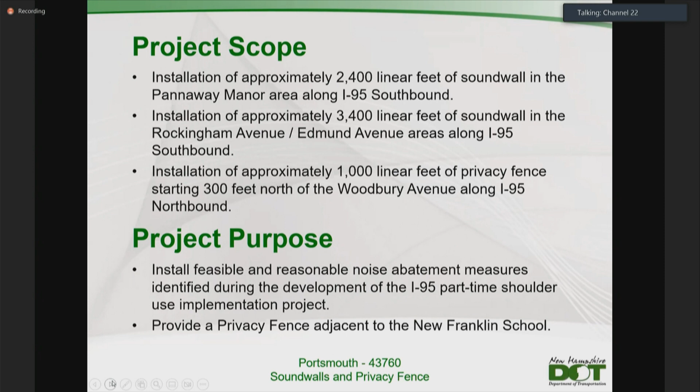Well, good evening everybody, thank you for coming out tonight. As Sam mentioned, my name is Phil Kendall, and I work with HNTB Corporation. We're the consultant firm helping New Hampshire DOT design the sound wall and privacy fence in Portsmouth. Here with me today is Dylan Gobey, who's going to be running the computer and the projection screens up here.

Before I get into the project overview, I'd like to go over the graphics on the walls that most of you were looking at before the meeting tonight. What's being displayed there is our proposed design, with aerial imagery underneath. Please note the aerial imagery closely matches the ground survey, but there are some slight differences. We also have some displays in the hallway out there.

There were also some profiles below those plan views, which I'll get into more detail on when I get into the presentation. There just wasn't enough room to hang up the profiles in this room. As I go through the project overview, Dylan's going to zoom into the plans so you can see them better from your seats. I know the plans are small in the distance, and even on the screen across the room it can be hard to see, so don't worry, Dylan's going to zoom in and you'll be able to see things in a lot better detail.

The sound walls for this project are broken up into two areas, as Sam mentioned. There's the southern area down by Sherburne Road, and then there's the northern area up by Woodbury Ave. I'm going to start with the overview in the southern section, and this plan shown on the screen is the same as the plans on the wall. It's just a little bit brighter up here, and Dylan's going to zoom in for us.

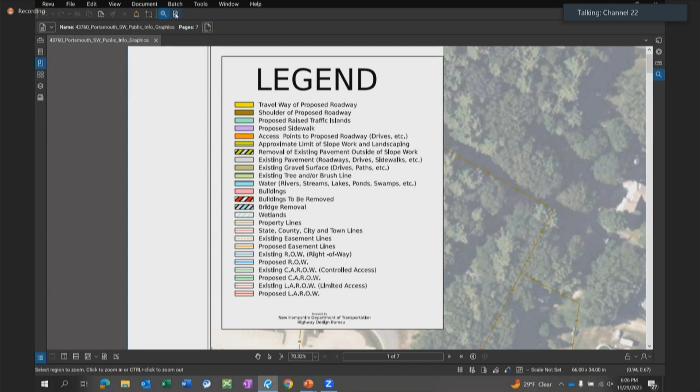Now, the southern segment of the sound wall starts just north of the right-of-way line near the bus terminal station and extends 400 feet north up to Sherburne Road. In this plan, you'll see the two colors I just mentioned, the light green, which is the existing tree line that's going to stay post-construction, and the lime green, which is the area disturbance, all within the state's right-of-way.

That area disturbance will be used by the contractor to access the construction site and to construct the sound walls. In the middle of this portion near Sherburne Road, you'll see a little bit darker image. That's representing a stone slope stabilization, used to stabilize the slope because it's a little bit steeper than a standard 4-to-1 slope. That's not typical for the project, but in some locations we had to utilize slope stabilization.

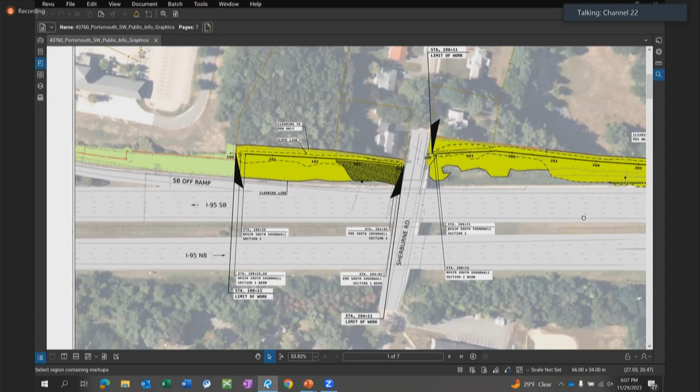In this area, the sound wall is approximately 60 to 65 feet off of the edge of pavement up on top of the hill. The second segment starts on the north side of Sherburne Road and extends approximately 2,000 feet to the north, running behind Pannaway Manor.

In this area, the sound wall offset from the highway edge of pavement varies between 80 and 25 feet as we go along. Again, you'll see the lime green color on the screen. That's the area disturbance that the contractor will use to access the site to construct the sound wall, but all within the state's right-of-way.

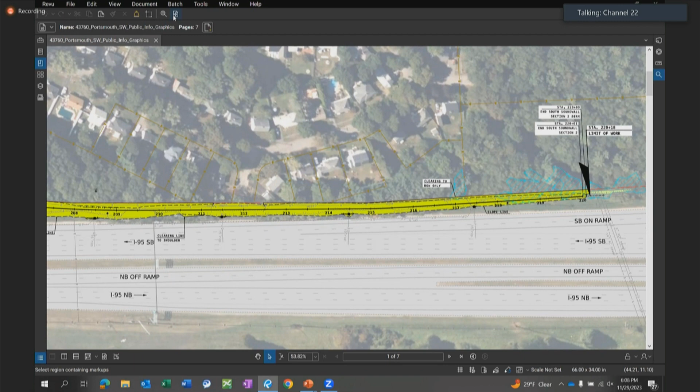At this point, we'll take a look at the two profiles for these two sound walls I just mentioned. In the upper left-hand corner is another legend. This legend has 5 colors in it, very similar to the previous slide.

The light green is the proposed slope work. The light brown is the existing ground. The dark gray is the proposed sound walls. The light red, or pink, is existing buildings, and the light gray is existing pavement.

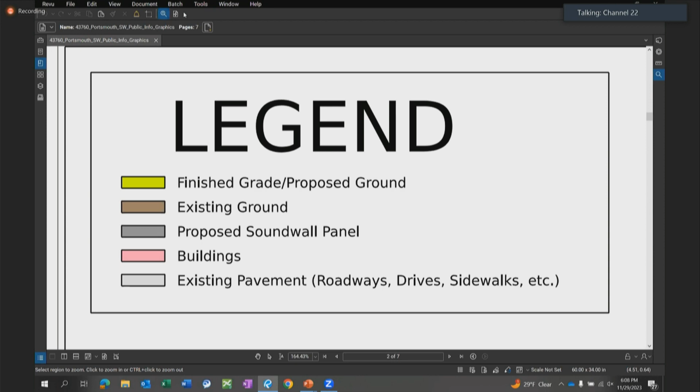The two profiles shown here represent the sound walls in the southern area, the ones I just talked about, spanning either side of Sherburne Road. The profile heights being presented here are based off of the noise study, and the heights provide the necessary noise reduction based on that noise modeling study. There are also gradual steps in the sound panels, which adjust the heights of the wall based on the needs developed by that noise model.

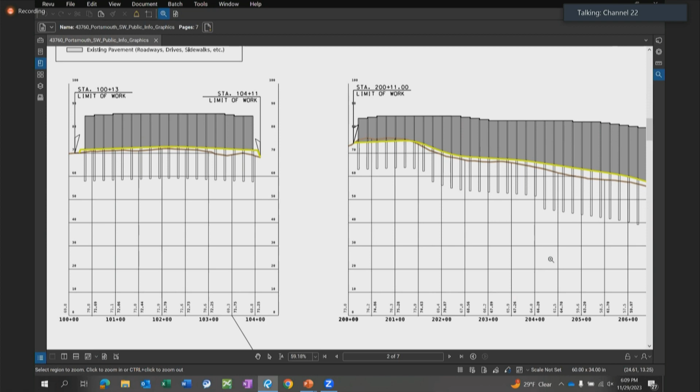What I neglected to say earlier, since I slowed down and Dylan jumped ahead of me, the sound wall height south of Sherburne Road averages about 15 feet. In the area north of Sherburne Road, extending 2,000 feet to the north, the height varies from 10 feet up to 25 feet, depending on where it sits on that berm, and comes down adjacent to I-95 southbound.

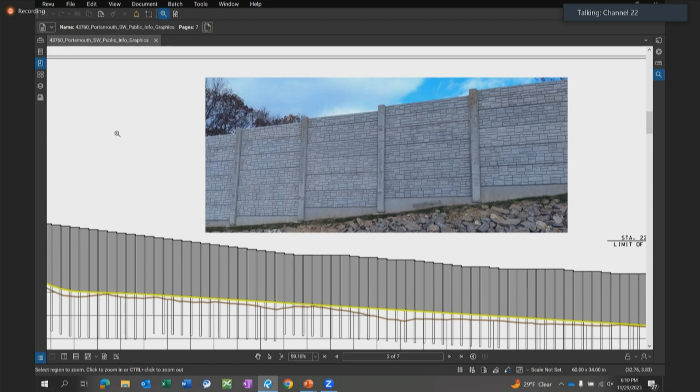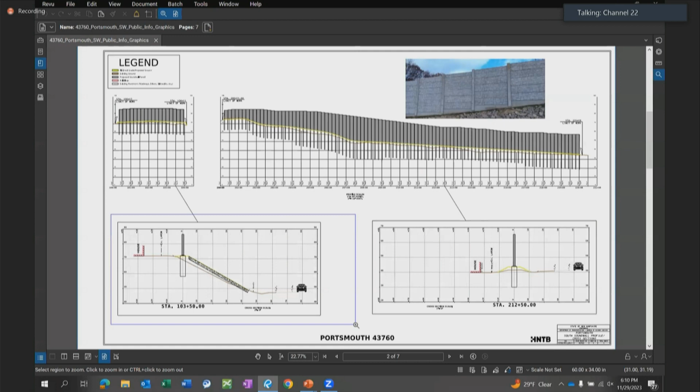They're intended to show the reference compared to southbound I-95 southbound, the sound wall, and any adjacent buildings. The first representative section is along the southern sound wall, and in this image you'll see I-95 southbound represented by the image of the car on the far right-hand side, and the proposed ground in front of and behind the sound wall is shown in the lime green, and then behind the sound wall is the light red showing an existing building.

Also in this image, you'll see that showing the stone slope protection I mentioned earlier. Again, that's not typical for all the sections throughout the corridor, but only in areas where we had to steepen up the slope.

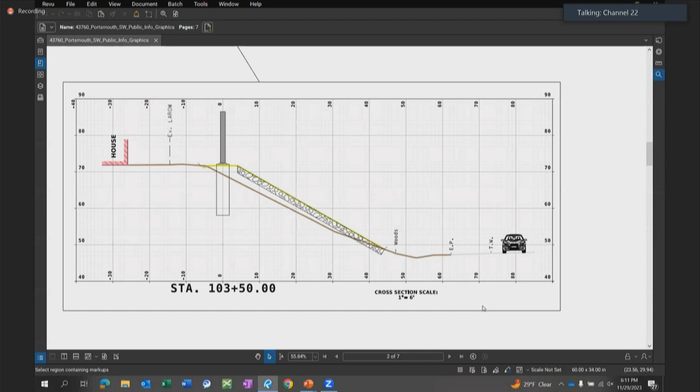The second representative section is along the northern sound wall, showing where I-95 southbound is on the far right-hand side, again by the image of the car, and then the light lime green showing the proposed slope and berm in front of and behind the sound wall, and then a house in the light pink shown behind that sound wall.

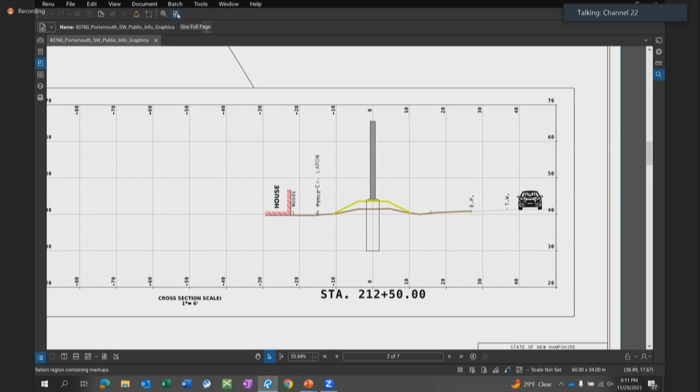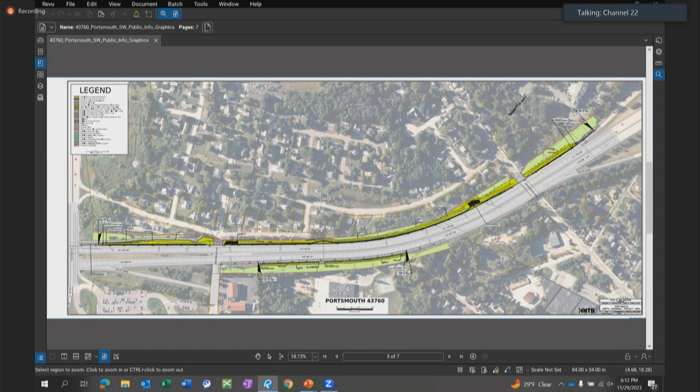At this time, I'm going to continue with the northern sound wall. This image, again, is very similar to the southern sound wall area, has the proposed layout and aerial imagery in the background, same as the graphic hanging on the wall. The difference between the northern sound wall and the southern sound wall is the northern sound wall is broken up into 3 segments. The first segment starts...

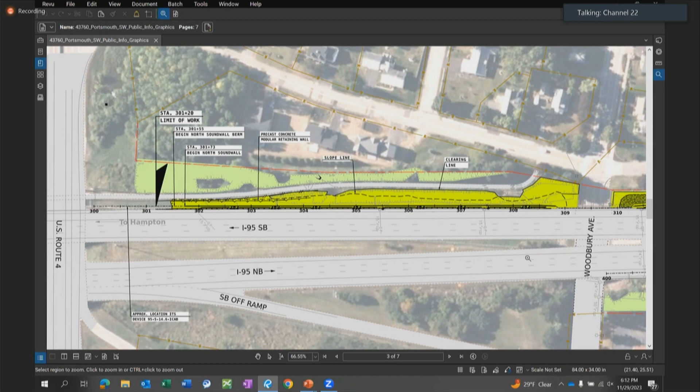Just north of Route 4 and extends for 700 feet up to Woodbury Avenue. What you'll also notice is this is the area where the multi-use path comes from Woodbury Avenue and up and over.

It should be noted that the intent is for this multi-use path to stay open during construction. However, there may be some short-time closures to allow the contractor to get their equipment in there or to do some small setup of equipment, but the intention is for the multi-use path to stay open during construction.

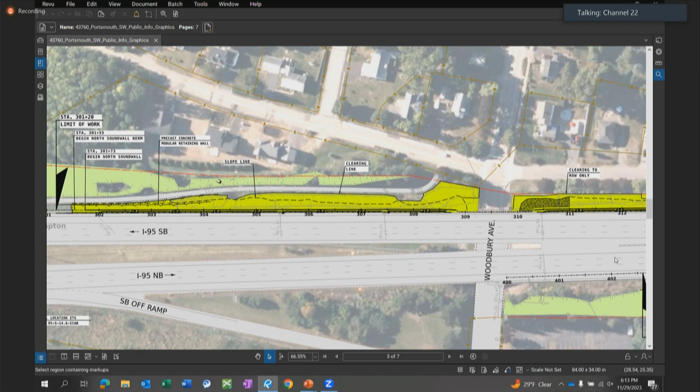As we're panning to the north, the second segment is approximately 2,000 feet, and it runs between Woodbury Avenue and Maplewood Avenue.

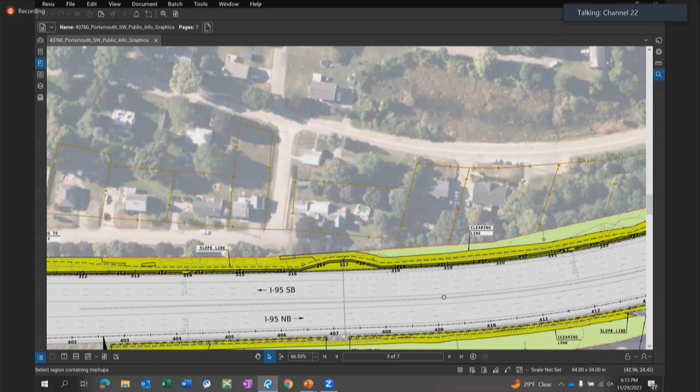This segment has 2 bump outs in it that are needed to get around the existing overhead sign structure foundation and the new part-time shoulder use sign foundation. In all other locations, this sound wall is approximately 5 feet off of the edge of pavement.

As I noted previously, in the same section you'll see the 2 different colors: the light green representing trees that will stay in place post-construction, and the lime green is the area of disturbance that the contractor will need to access and construct the new proposed sound walls.

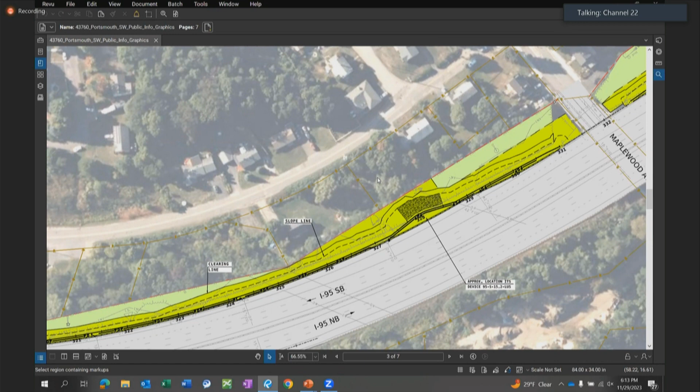The final segment, the third segment of this section, is about 340 feet long, and it runs from Maplewood Avenue and extends up to the Market Street on-ramp, which is the northern limits of the sound wall, and that's where the project will end.

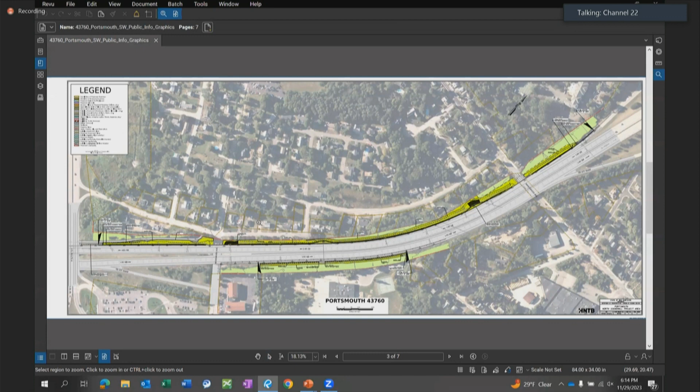Again, that section is also approximately 5 feet off the face of the sound wall, off the edge of pavement.

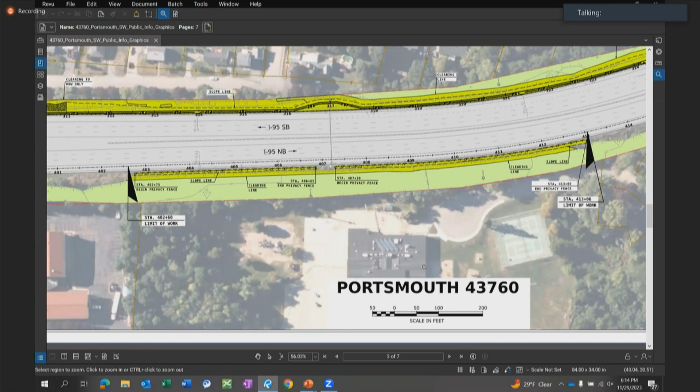Also included as part of this project is a privacy fence. The privacy fence, as Sam noted earlier, starts about 300 feet north of Woodbury Avenue and extends for 1,000 feet to the north. You'll notice there is a small 50-foot gap in that privacy fence, and that is to account for the existing overhead sign structure foundation.

We did evaluate whether or not we could do a bump out similar to the sound walls shown just previously. We looked at it, however, the impacts associated with installing the bump out to get around that foundation required all the trees to be removed on that slope right down to the school. So it was felt that it was better to leave the trees and put a gap in the privacy fence.

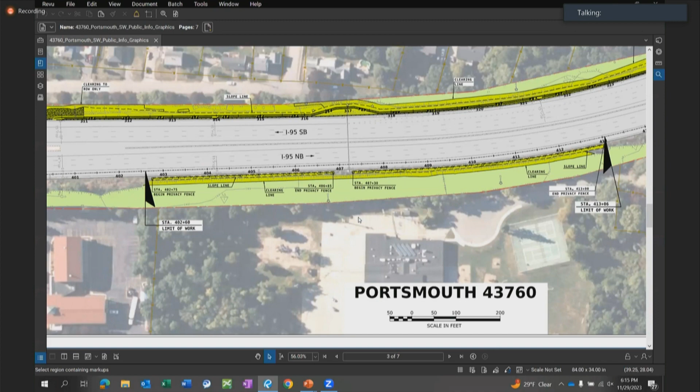Okay, the profiles. Similar to the southern sound wall area, the northern sound wall area has some profiles up here. There are 3 different profiles, or 1 continuous profile, but 3 sections of profile for the 3 segments of the sound walls. The heights of that sound wall vary between 17 and 21 feet from the southern end by Route 4 up to the Market Street on-ramp.

So you'll see the profiles on here, the same colors, that same image that I showed you about the sound wall that was just constructed in Londonderry. Nice architectural finish on those concrete panels, which will have the same finish here in Portsmouth.

Below the profiles are 3 representative sections. The first one is along that southern segment by the multi-use path. The second representative section is actually around the privacy fence. And the third representative section is in that middle section of sound wall.

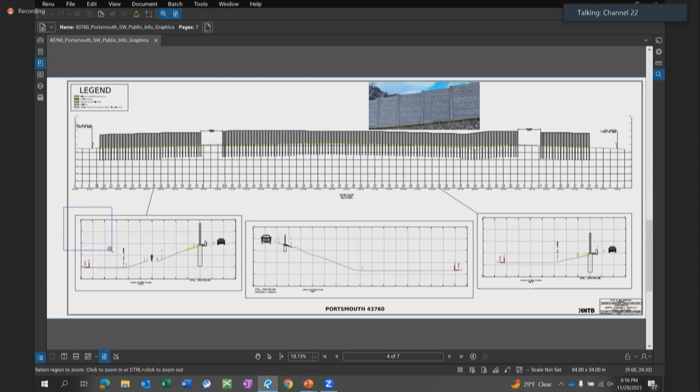So looking at that first representative section, similar to before, southbound I-95 is on the right-hand side, shown by the picture of a car. The proposed slope in front of and behind the sound wall is shown in that lime green, and you'll see the multi-use trail there behind the sound wall, and then behind that, in that light red, is an existing building.

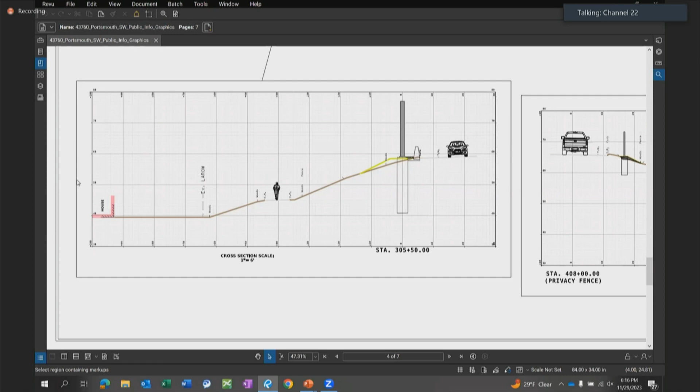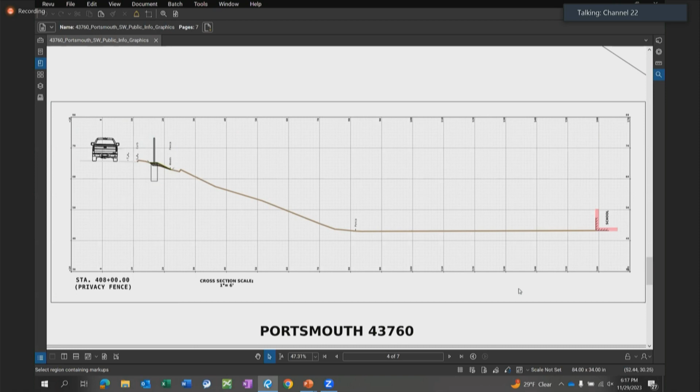As we pan over to the next one, the next representative section is again by the privacy fence. We showed a vehicle on I-95 northbound, a picture of a pickup truck on the left-hand side. Then again with the lime green showing the proposed slope in front of and behind the privacy fence, and the school in light red in the far right-hand corner.

The next representative section is that middle portion of sound wall. I-95 southbound is shown on the right-hand side in a picture of a car. We have the lime green showing the proposed slope in front of and behind the sound walls, and in the far left-hand side, in light red, is an existing building.

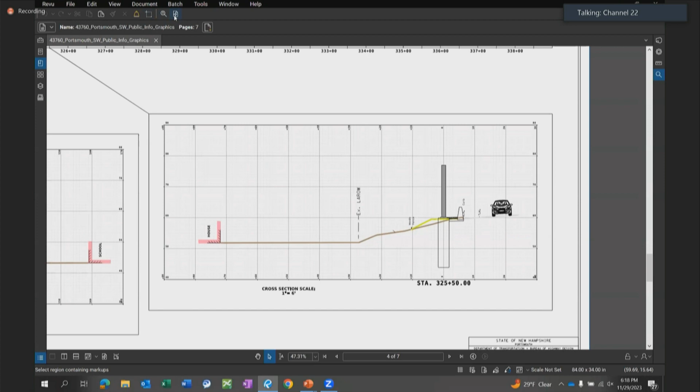So with that, I'm going to hand it off to John to talk about the noise modeling.

Thank you, Phil. Again, my name is John Evans. I'm the Air and Noise Program Manager for the Department of Transportation. I am also the Project Management Section Chief for the Environmental Section of the Department. Right before I get into the aspects of the noise investigation, I do want to mention a couple other things related to just general environmental review.

This project is, as with any New Hampshire DOT project, undergoing an environmental review as part of what we call the NEPA process under the National Environmental Policy Act. That requires us to evaluate all potential environmental impacts associated with any project, including this one. So we are evaluating endangered species and wetland impacts and all of those kinds of things as part of this environmental review.

One of those pieces of that environmental review is Section 106 of the National Historic Preservation Act, which is essentially a law that requires evaluations of potential historic and cultural impacts related to construction projects such as this.

Section 106 of the National Historic Preservation Act allows people to become what are known as consulting parties to that historic analysis process. If there are any individuals who do wish to become part of that 106 process as a consulting party, please get in contact with me via email, as well as Sam Newsom, via email or call us, or whatever—at the end of the presentation our contact information will be up on the screen, if you feel that may be something of interest to you. Again, that's kind of an advisory role to the historic review process. It's not necessarily related to, say, concerns related to noise specifically, it's more related to historic cultural resources.

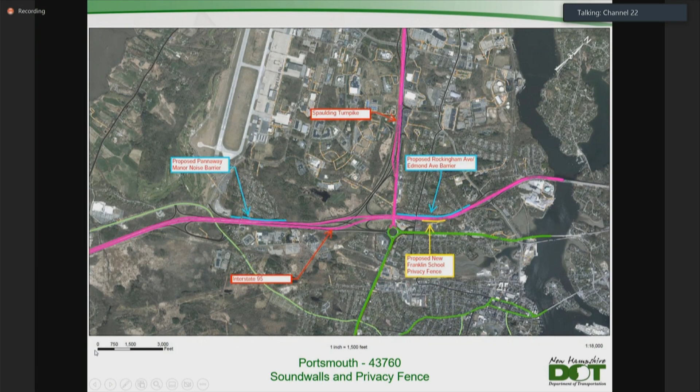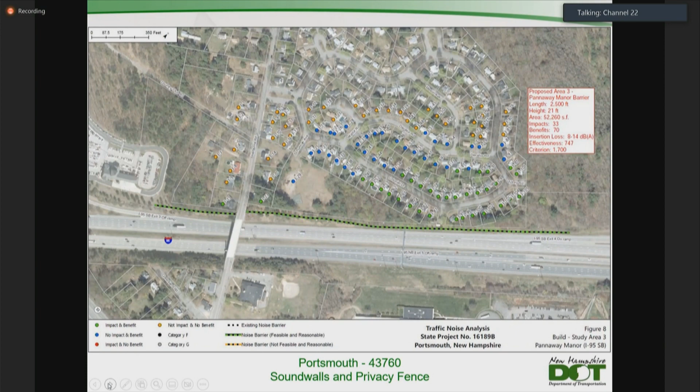So moving on to the next barrier, this barrier will provide... let me flip to this because I can read it better.

There were 34 noise impacts identified within the Rockingham Ave, Edmond Ave neighborhood. And this barrier would provide 49 benefits, meaning 49 homes would receive at least a 5 decibel reduction or more.

This barrier itself will require 72,180 square feet of barrier. Divided by the 49 benefits, that gives an effectiveness of 1,473 square feet per benefited household. As that's below 1,500 square feet, or in this case 1,600 square feet, this barrier was determined to be reasonable, and therefore it was proposed for construction.

You will note, as Phil noted, there are going to be gaps over the bridges. From an engineering standpoint, at this point, there are substantial issues with being able to construct the barriers over the bridges. So they will stop, and there will essentially be a gap over the bridges, but these do still provide benefits.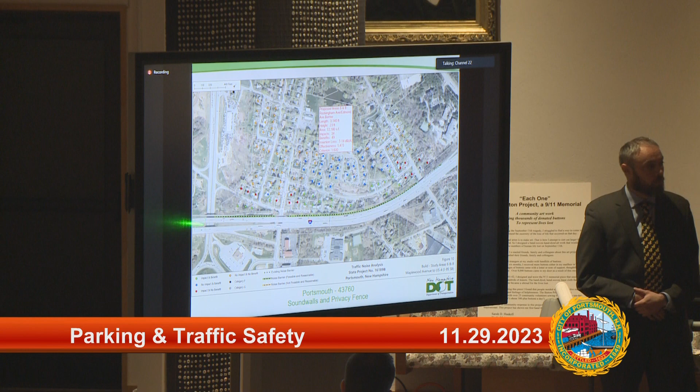And then, just to answer your second question, this will be work constructed during the day. They might need to do a handful of things at night, but this will be done pretty much behind the barrier, off the road, during the day, so it should not be nighttime work for a majority of that work.

Do you have data to suggest it's not going to increase the smog on our side of the highway? So noise barriers are not a form of air quality mitigation.

As part of this project, an environmental review is underway. This area of the state actually has really good air quality, and really the entire state has good air quality. We review air quality both from a regional planning aspect and at the project level.

Regionally, this is not the type of project that would result in increases in or violations of the National Ambient Air Quality Standards, nor would it result in potential localized air quality issues. Typically those are related to intersection projects in areas extremely close to the highway or roadway, say a park that's 10 feet from the edge of an extremely busy intersection. That would be the type of circumstance.

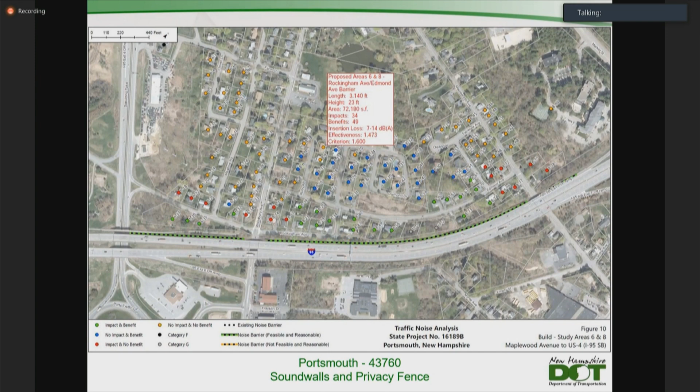Okay, all right, any more questions? Yes, sorry. Bob Lister, 69 Diamond Drive. First of all, I just want to say we're pleased that you're here this evening, thank you very much for all your work on this. I also wanted to thank all the city people who worked on this as well, because this has been talked about for a long time, not only for the Pannaway Manor people, but also the Edmond Ave, Rockingham. I would also like to say I'm pleased that New Franklin School is getting something out of this, because originally they weren't part of the plan.

Thank you very much for that. My question is: is the breakdown lane going to be used permanently with this? And also, is the greenery at New Franklin, did I hear you say that's going to remain? It's not going to be taken away?

So the part-time shoulder use is only going to be used during peak time. That's not going to be a continual use of that lane. It'll be over peak weekends like Memorial Day, 4th of July, Labor Day, to alleviate the queuing and traffic backup.

In regards to the trees for the Franklin School, is that going to be similar to the offset, with the fence at 10 feet, the privacy fence, 5 feet to the back, another 5? So the existing fence that's there - this will be going right on the backside, very close to that.

As Eric mentioned, we were in front of the Parking and Traffic Safety Committee meeting in January of 2022. At that meeting, we reviewed a lot of information, first and foremost the project purpose and need. Since it's been the better part of just over a year, I'm going to revisit those alternatives we talked about, and for the benefit of the public that didn't get to hear, review those two alternatives, and then also visit for the first time this third hybrid alternative that the committee asked for.

First and foremost here, it's important to identify the purpose and need for the project. Once again, this is at the intersection of Middle and Summer. The purpose is to modernize the existing traffic signal control equipment and provide increased mobility and safety for all users, including vehicles, pedestrians, and bicyclists. For this project in particular, I certainly want to accentuate the need for all users, and that's what we're kind of focusing on here today.

The need, for those of you that are familiar with the intersection, should be fairly obvious, but it's demonstrated by the outdated and aging signal equipment and the pedestrian infrastructure, the pedestrian landings, the push buttons. A lot of the equipment out there isn't up to current ADA standards, the Americans with Disabilities Act, which is obviously very important as we touch and improve these intersections. Again, circling back to the need to improve the intersection for all users. You can go to the next slide, Eric.

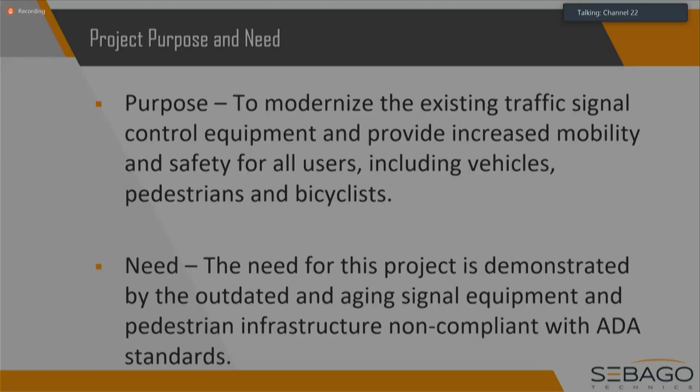Once again, project location. We're at the intersection of Middle and Summer. Throughout this presentation, I may be referencing cardinal directions, so just to make sure we're using the same language here. Middle Street we're defining as the main line, so northbound, southbound. Northbound refers to traffic heading inbound towards downtown, and southbound heading outbound. We've also got the intersection of Miller Avenue, otherwise known as Route 1A, and Summer Street. Miller Avenue I'm referring to as westbound, Summer is eastbound. We're just to the north of Cabot Street, and approximately 1,300 feet south of the signalized intersection of State Street. So that's the subject location.

Next slide, Eric. Some of the existing conditions focusing on the signal equipment itself. Obviously it's a four-way signalized intersection today. This intersection operates as a fixed time intersection, meaning there is no detection out there for vehicles today. The reason that's important is regardless of the time of day vehicles might enter the intersection, this signal will cycle through all phases on all approaches, regardless of demand. So if there's, for instance, 20 seconds programmed on the side street, that 20 seconds will be serviced both during peak times and in the middle of the night. The reason that's important is if we're servicing approaches that don't have vehicles on them, that's a less efficient operation, and there are ways to improve that through vehicular detection.

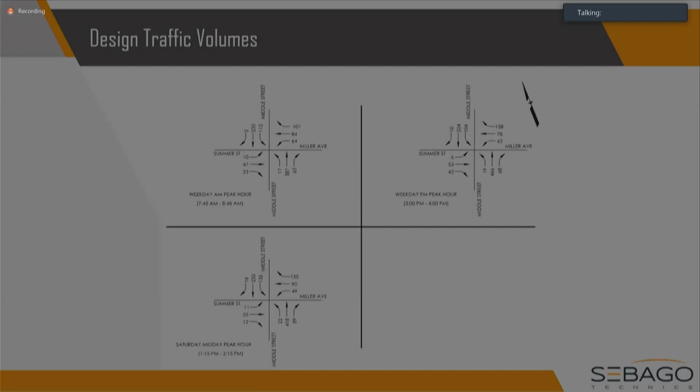So again, 2 alternatives were presented to the committee back in January of 2022, for those of you that remember. Alternative 1 was basically maintaining the existing lane configuration.

Alternative 2 was providing dedicated left turn lanes for both southbound and northbound approaches. And then alternative 3 that the committee asked us to look at was evaluating what the intersection would look like if we only provided a left turn lane for the southbound or outbound direction, given that was a much higher volume and the northbound direction was so low. They wanted to see what the impacts were with that.

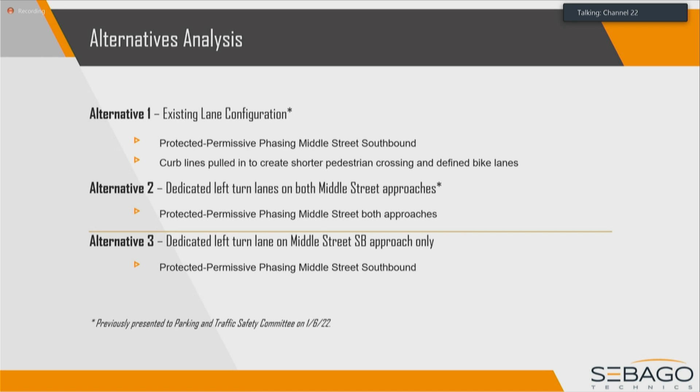And so I'll go through some of these points in more detail. I think it's more appropriate to talk over the plan. If you want to go to the next slide, Eric, I'll get a little more detail here. I apologize for those of you that can't see the scale, but I believe these plans, if you printed out the agenda, are at the back, you can look at a little closer.

I'll try to articulate some of the improvements here. So this is deemed alternative 1. Once again, it maintains the geometry on all 4 approaches as far as the vehicular geometry is concerned.

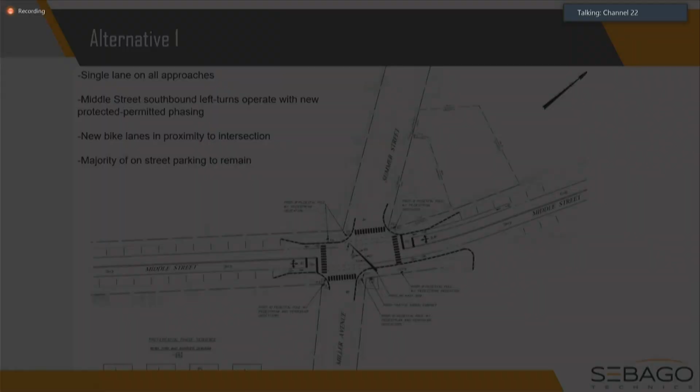I should talk about the signal equipment too. The signal equipment changes apply to all three alternatives. None of the signal equipment is changing, so I'll speak to that here.

For the signal equipment itself, backing up a second, that mast arm you saw on those street views will be replaced. There'll be a new mast arm meeting current New Hampshire DOT standards with a correct foundation design, proposed to go on the corner of Miller and Middle, a different corner than where the existing mast arm is today. You see the ground-mounted foundation and cabinet there. As best we can, we're trying to get all those signal heads on the mast arm.

For the southbound approach in this alternative, it requires 3 signal heads: 1 for the dedicated left turn lane, 2 for the through movement. 3 signal heads for the northbound approach as well, again all overhead. For the eastbound Summer Street approach, that's going to be supplemented by pedestal poles, so a 10-foot pedestal pole for that approach. Miller's going to be on the mast arm itself as well.

Further improvements that apply to all alternatives are the ADA improvements, so there'll be APS push buttons on all corners. The pedestrian landings or ramps would all be redone, brought to standards such that they're flat enough that if a wheelchair wants to stop at the landing, they have the ability to do so. Sometimes these landings become too steep so a wheelchair can't stop on it, so there would be some minor geometric improvements to flatten those out. We'd put what's called detectable warning panels or warning fields at the intersection for visually impaired people so they know they are entering the intersection.

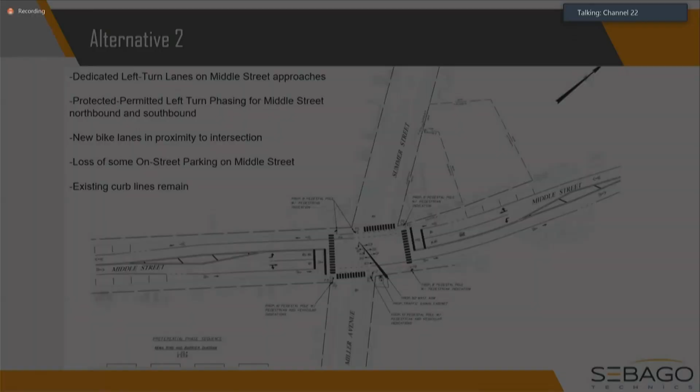This one's a little weird, but this is the third hybrid alternative. Heading outbound in the southbound direction, really nothing changes because we're keeping the left turn lane, the bike lanes are there, the on-street parking is there. The big change between 2 and 3 is in the northbound direction.

The left turn lane is eliminated, but you'll see there's what we're trying to designate as striping there in the middle. The reason for that is to align the northbound through lane with the lane opposite the intersection, because now that we're providing this left turn lane, we have to do what's called shadowing, just to get the alignment such that vehicles are looking where they should go.

From a width perspective, within the immediate vicinity of the intersection, the impacts are essentially the same, but we're able to taper back to existing quicker. So there won't be a dedicated turn lane in that direction, and therefore the impacts to parking are less with this alternative.

I should mention wherever there are dedicated left turn lanes provided—in this alternative in the southbound direction, and in the second alternative both in the northbound and southbound direction—those turns would be controlled by protected permissive left turn phasing. What that means is at the front end of the cycle, motorists would get a green arrow to be able to cross without any conflict, and then that would transition to a flashing yellow arrow or a green ball like what's there today, making motorists wait for a gap in traffic. So all left turn lanes, where formal left turn lanes are provided, the control would be through protected permissive phasing, incorporated as part of the signal design.

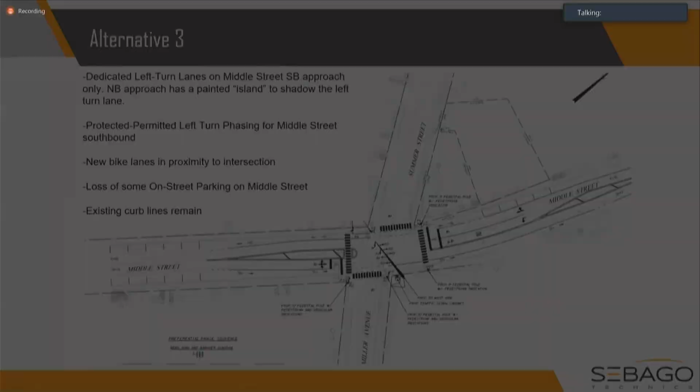A lot of numbers on this slide. As traffic engineers, we love numbers, so I'll try to keep this pretty brief. You're looking at two analysis periods here: the PM peak hour and the Saturday peak hour. The table on top represents the PM peak hour results, and the table on the bottom is the Saturday.

There are 3 columns, representing the 3 alternatives I just showed you. The rows represent the approach delay. The first row is Summer Street eastbound, second row is Miller Avenue or 1A westbound, and then we've got Middle Street, both northbound and southbound. You'll see numbers in there, representing the delay, measured in seconds per vehicle, or average delay in seconds per vehicle.

During that peak hour, for signalized intersections, there's what's called level of service. These numbers equate to level of service, graded A through F. A is optimal, F is unacceptable, and it kind of goes down from there. So you can see how these alternatives compare.

Under alternative 1, this probably shouldn't be a surprise to too many people, since we're not adding additional lanes, there's not a huge benefit from a level of service perspective. When I talk level of service, this is just for the vehicles, not pedestrian or bicycle level of service. So this is just how efficient we are at moving vehicles through the intersection.

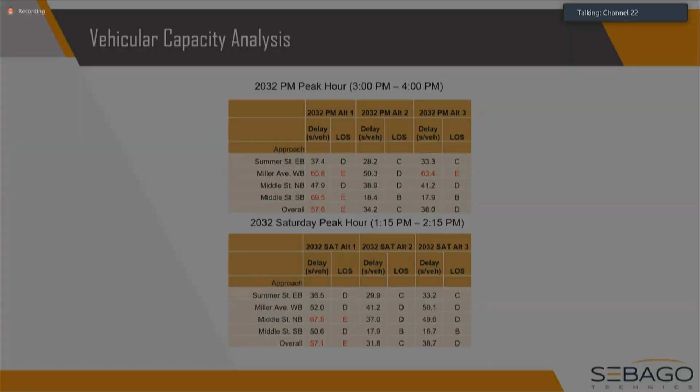This is a pretty simple table. I mentioned I wanted to talk about the impact to on-street parking. There's really no formal striped parking out there today, so best we could tell, we tried to estimate the available parking across these different alternatives. Columns represent alternatives 1 through 3, and rows represent both sides of the Middle Street intersection, south and north. Alternative 1, shouldn't be a surprise, we're not adding lanes, so that provides the most parking, 27 spots, 20 to the south, 7 to the north. Essentially no change from what's out there today. Again, we're reinforcing the fact you can't park within the immediate vicinity of the intersection.

Moving to alternative 2, that has the most impact on street parking. Those 20 available spaces south of the intersection get reduced to 6 or 7. North of the intersection goes down to 4, so not as bad, for a total of 10.

Alternative 3, that hybrid option where we eliminate the left turn lane for the northbound direction, south of the intersection has 10 spaces, and north of the intersection has 4, for a total of 14.

So again, a lot of things to consider. We're working with the city, hopefully, to try to advance an alternative to formally go out to bid and get this thing constructed. But there's a lot of factors here at play, the impacts to bicyclists, safety of the intersection, capacity of the intersection, and obviously impact to parking. So the goal here today is to get your thoughts, open it up to Q&A, and have some discussion on the intersection, and see what we can do to move forward.

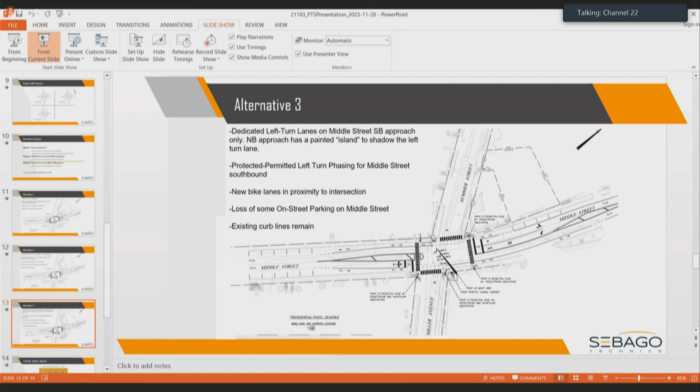The edge of pavement is the same, the curb's not moving in, but the through lane is now closer to the curb, because we're kind of doubling up as that bike lane. I'm explaining this poorly, but in this area there is kind of a neck down, because this through lane is not here today. It's not a lot, Erica, but you can kind of see this. Oh shoot, you told me not to touch it, and I touched it.

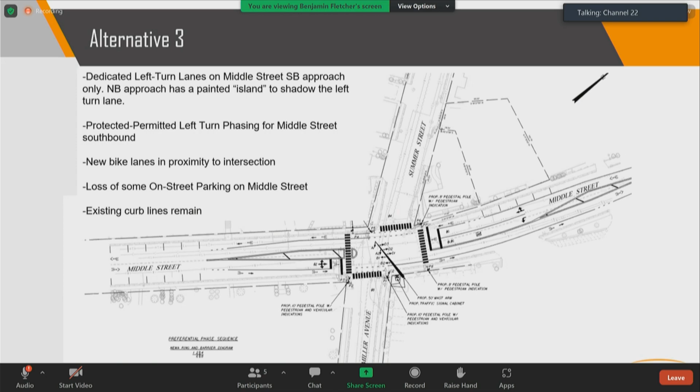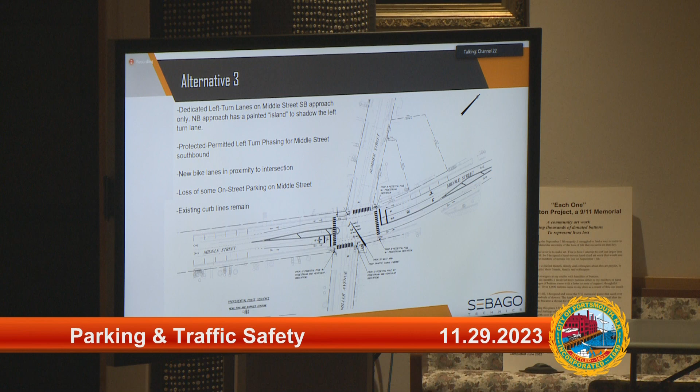The gray line represents the existing center line, which, since it's a single lane approach, we're now shifting to the west by 3 or 4 feet there. It's not as drastic as alternative 2, because we need the space to also put in a left turn lane. That's why we're able to get a left turn lane in without widening. Something's got to shift.

If we have to vote on one of these 3 choices tonight, I feel like 2 is a non-starter. Erica, we're still in the question and answer, not getting to that yet. All right, I will keep my conclusions to myself right now.

Just like we did with the sound barriers, we don't always open up after presentations to questions. We're going to open up for questions particular to this, which will then be followed by public comment, which pertains to anything in the PTS meeting agenda tonight. And then we'll move on with the agenda.

So if there's any questions from the crowd, residents first. Mr. Chair? Yes, chair. Look this way. Oh sorry, I'm sorry, I missed it, I was so focused on the screen.

I just had a quick comment. Residents are concerned about on-street parking, whether it's residential or businesses. And option 3, which is an alternate, the hybrid, that's 11 spots being removed to accommodate for what?

A safe intersection. It's alignment of the northbound direction such that it lines up with the receiving lane, and it's also to provide a left turn lane in the southbound direction. If we wanted to keep the parking that's there and have these improvements, we would need to widen the intersection and move the curb line closer to the buildings and reconstruct sidewalk, and that's certainly outside the scope of this project. That question is being asked based on public input.

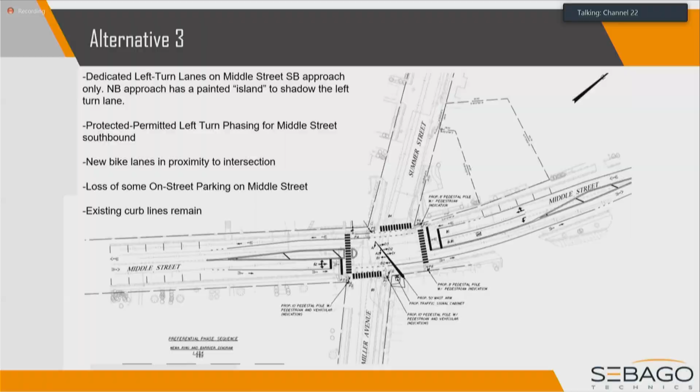Yeah, no, it's fair, that I'm hearing. That's it. Anybody else on this side? Sorry about that. All right, I'll open it up to the public.

It's not working. I mean, I can hear you, but no, it's not. The battery might be dead. I see Kevin coming into the room. Save the day.

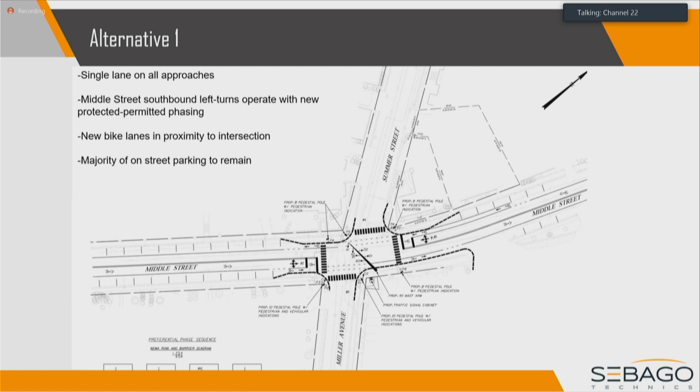The point is that in option 1, the enlarged corners of the intersections visually create an effect to slow traffic going in all directions that I think is effective. I also think that it emphasizes the offset between Summer and Miller. I do want to speak in more detail about the traffic speeding issue we have on Summer Street, but I think that's a conversation for your normally scheduled meetings. But I think that offset helps slow traffic coming down through there from Summer Street, so I do think that's important. And again, I'll reiterate that the traffic turning left has a lane on the outbound direction to be able to turn onto Miller Ave. I think that's it, thanks.

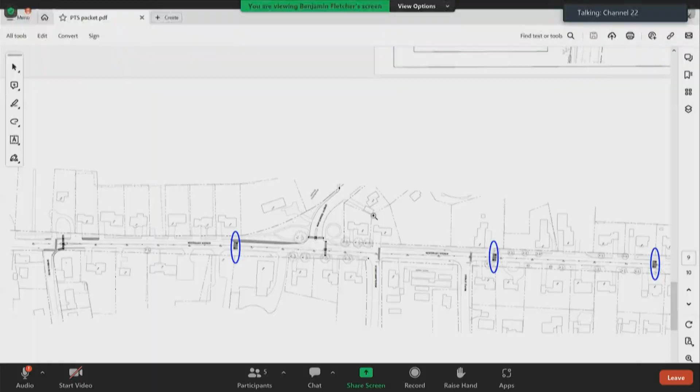The feedback we received at the meeting earlier this month was that the overall number of 8 speed cushions was just a little too much, and the residents in the area would like to see fewer. So we have a revised plan in the packet—I could bring it up here as well. Hard to see on the screen, but we've reduced the number of speed cushions from 8 down to 6.

This allows us to still have each speed cushion with 500-foot spacing, which is key because that keeps traffic down to 25 miles per hour. Once you increase that spacing beyond 500 feet, you're going to pick up speed between the cushions, probably closer to 30 miles an hour again. It was really a desire to keep speeds at 25 that's why we're keeping the number of cushions at 6, reduced from 8.

We took one of the speed cushions out that was there in the summertime, in the area between Echo Ave and Maplewood Ave, so there's just one cushion there instead of two. Going down the corridor, there was another one between Farm Lane and Rockingham—we reduced that by one as well. So there's 6 still proposed, down from 8 originally.

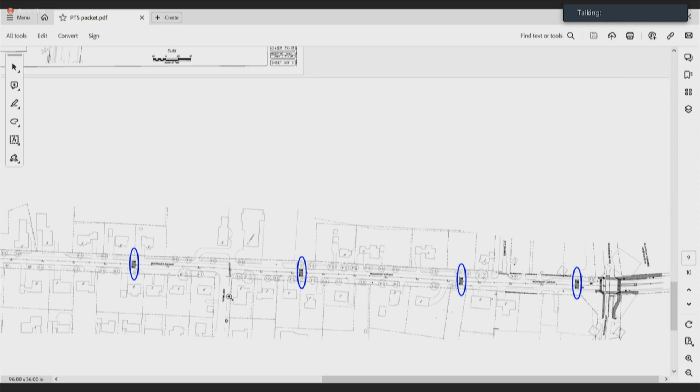Thank you, and I'll open it up to the committee for questions. Mark? I just got a question for Eric. Eric, are those cushions going to be permanent, or are they going to be put in for seasonal?

No, they would be permanent. When the road gets reconstructed and repaved, they would also be formed as part of that road work. So they would be asphalt, not rubber, and permanent year-round. They'd have less noise difference because of the same material, and there wouldn't be a lip where cars hit them abruptly—it would be a smoother transition. Okay, we're not making decisions or voting here, this is for discussion only.

What I've heard back in the summertime, I got phone calls from 2 residents on Woodbury Avenue. I spoke to Eric tonight before the meeting. So I asked Eric how many vehicles drive down Woodbury Ave a day. That number, based on what he told me tonight, was between 7,000 and 10,000.

The issue that 2 residents had this summer is that speed tables, speed bumps, speed cushions caused a backup of traffic, so they couldn't get in and out of their driveway. The other concern is emergency vehicles, whether fire, police, especially ambulance, that it's going to impede their response time. Now if you live on Woodbury Avenue, that could be a concern. Or you can look at it this way: how many vehicles per year, historically, do emergency vehicles go down that street. So I just wanted to bring up 2 topics, one from a resident and one based on emergency vehicles.